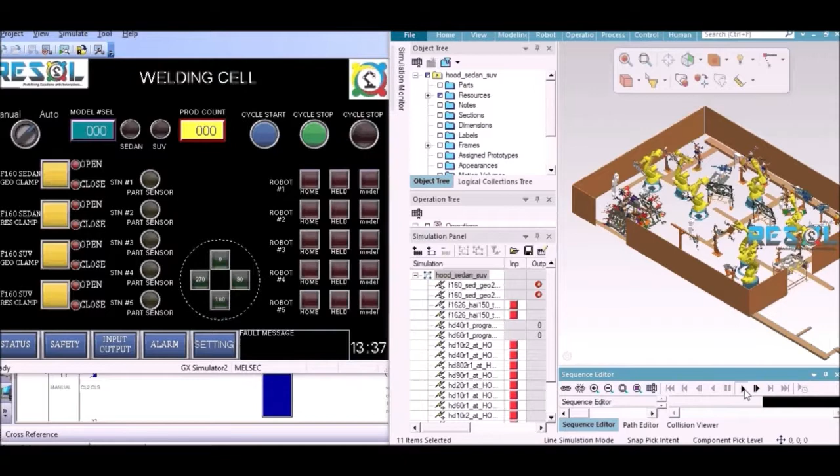Resol Robotics and Process Automation Private Limited has expertise in virtual commissioning with all makes of PLC. The simulation work cell is integrated with virtual PLC and HMI to exchange signals and logic.

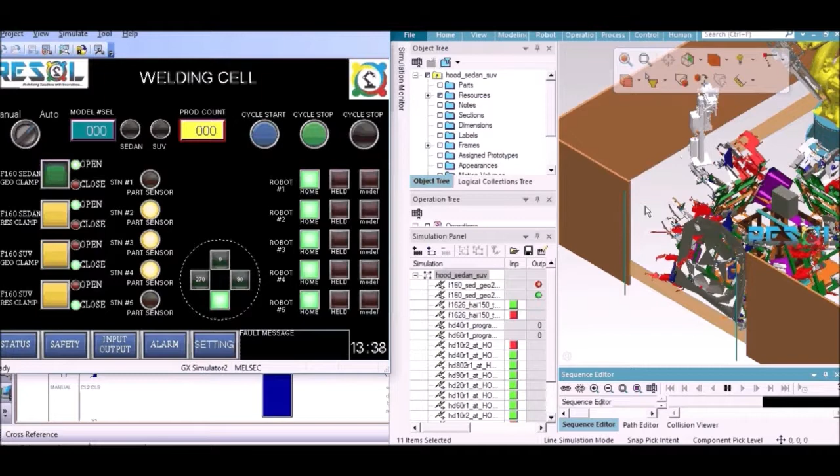It can be seen that the fixture clamps in simulation work cell can be opened and closed from virtual HMI screen. Programs for different models can be run in simulation by entering the model number. The parts present on the fixtures and turntable status are indicated on HMI screen.

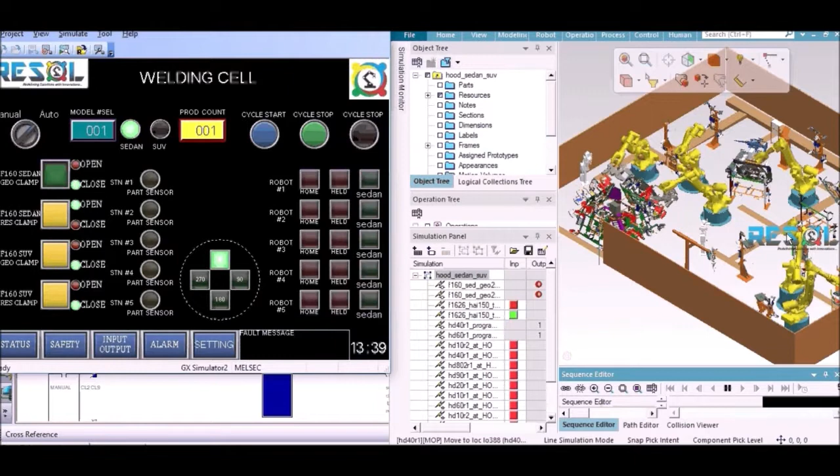This is a typical spot welding cell developed in Tecnomatix Process Simulate with turntables, fixtures, tip dressers, tool changers, SSW and material handling grippers. It has all major BIW applications like progressive spot welding, respot welding, stationary spot welding, material handling, sealing and mastic application.

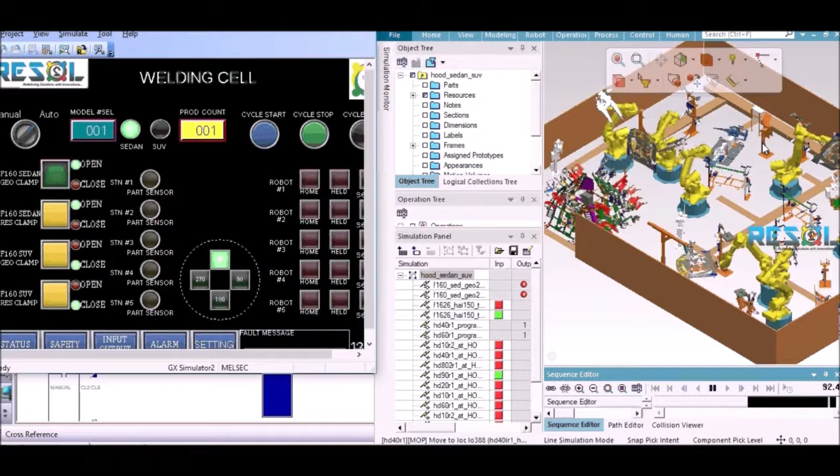With virtual commissioning, the complete PLC ladder logic and HMI screens developed offline can be checked and debugged with simulation work cell in virtual environment without the requirement of real PLC. This helps in seamless transition from virtual to real environment, improve quality and reduce installation downtime.

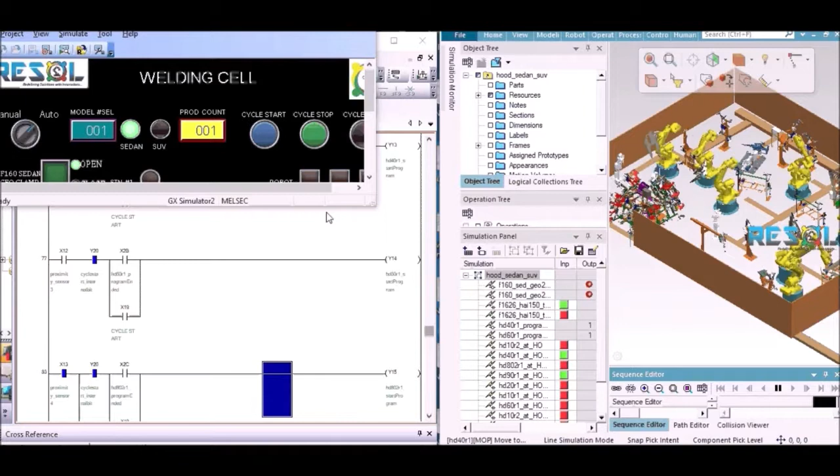Another benefit is to provide plant maintenance operators with virtual environment for training with safe and optimum conditions. After complete testing and validation in virtual environment, the offline programs developed for PLC, HMI and robots can be directly uploaded to real environment.

At the end of the video, the robot interference zones can be visualized in real time on the virtual HMI screen.

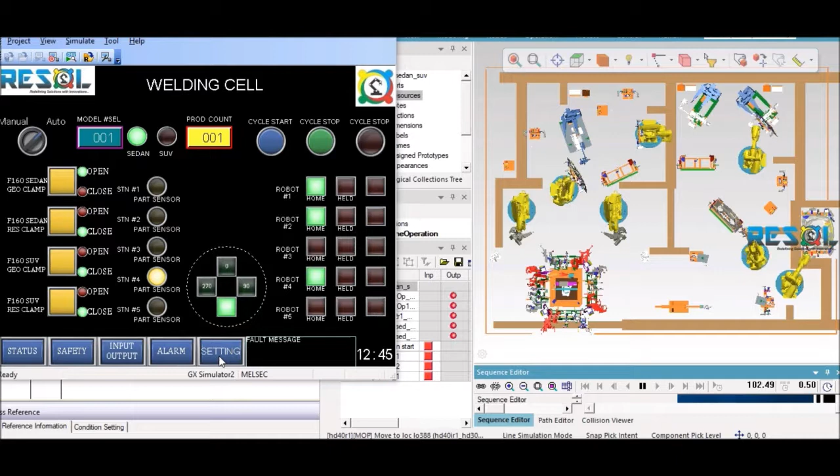As the robot enters the common interference zone, the HMI screen highlights the zones in red and turns to green when it moves to safe position.